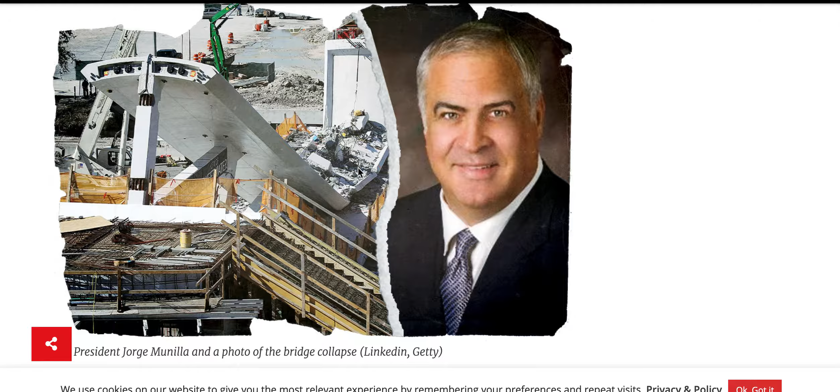September 24th, this is an older dated product. Reason why I brought it up for you guys is they hired a law firm suing Berger, the engineer. I looked at a few of these lawsuit postings, and this one seems more complete, that's why I'm showing you this one. I'll give you the link to the article below and you guys can read it one for one, but I'm just doing a quick narrative.

They said that once the use of the money towards the MCM, of $9.5 million towards the settlement of the university, it's total 14.2. They said 15 million here, but it appears they clarified down here, 14.2.

MCM is suing Morristown, New Jersey-based the Louis Berger Group. That's the engineering company that did the peer review, if you guys remember. A professional service provider that received some of the blame in post-incident government investigation. This is NTSB. The NTSB report said that because Berger's independent peer review looked at the bridge as a whole and not in increments, it missed a reinforcing flaw that led to the bridge's failure.

Berger's representative told the NTSB it was only paid to look at the bridge in increments. I understood it was paid not to look at it in increments, but the entire bridge, not as it builds. So it appears this might be a little defect in the article. I think Berger looked at it as an entire bridge and not as sections, and that's what I think this definition of increments means here. Of course the writer wrote increments here, and it's repeating something.

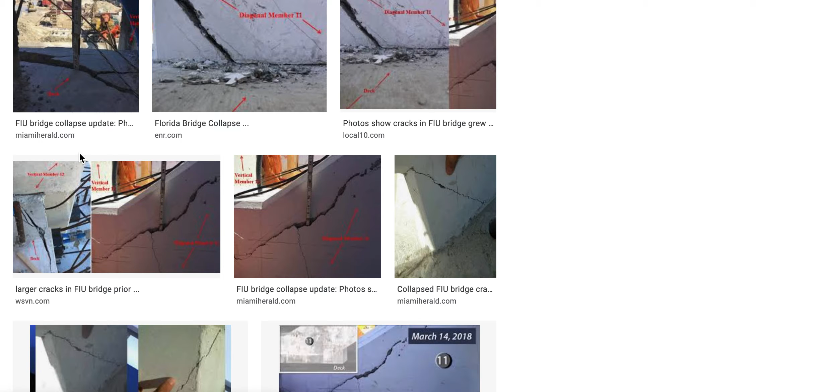So we know that cracks formed, right? So, and that's that one. When cracks form, so we have these cracks. Let's use this one. I think this is one of my images. Maybe not, because I did a lot. This is what they started post-tensioning on. So it's still in the air. And the MCM is claiming that, we don't know.

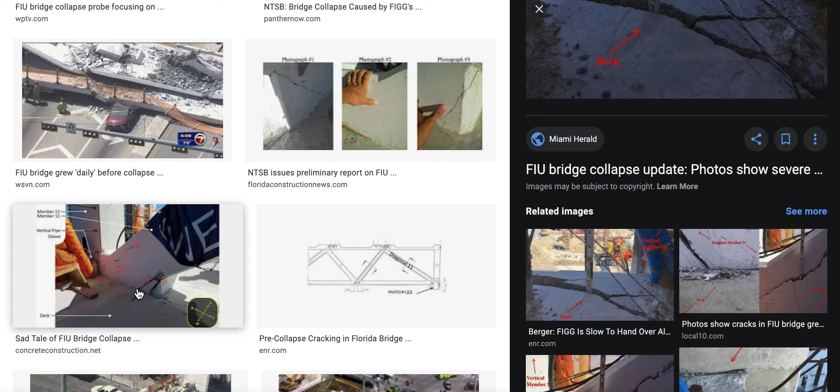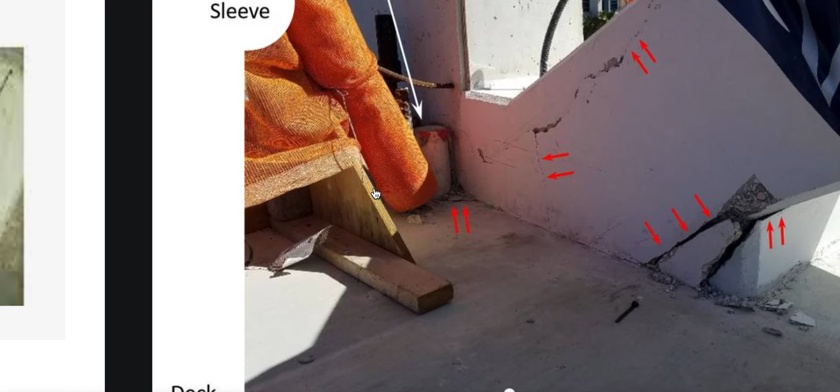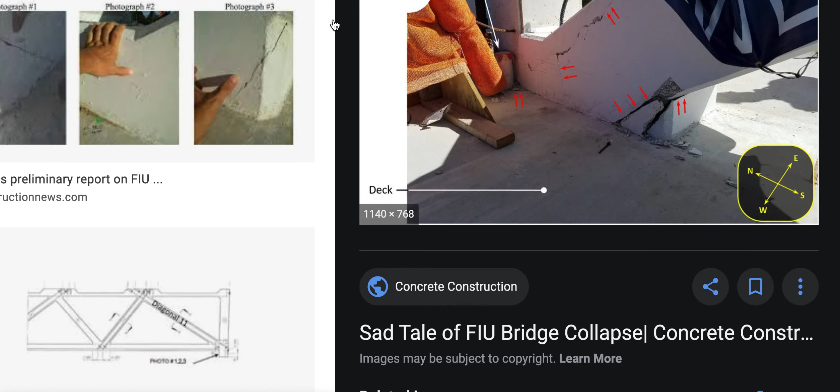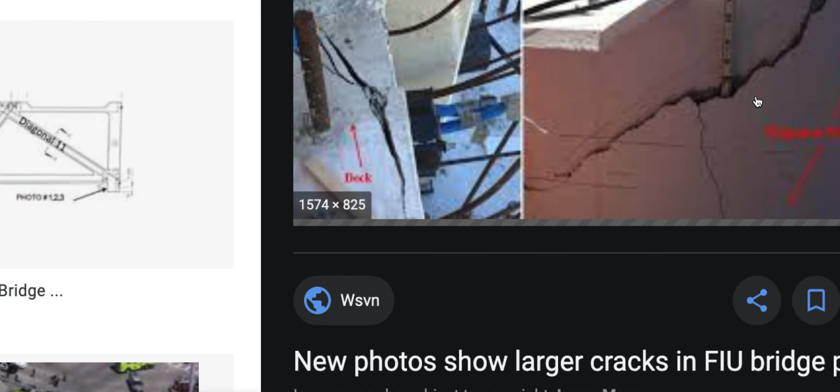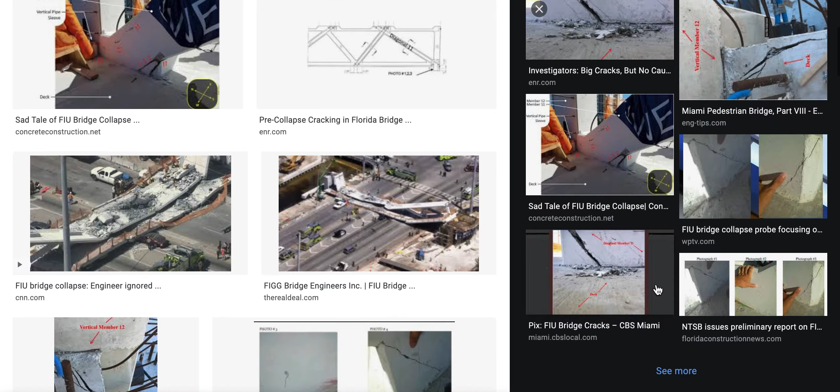But you can't post-tension, add all those thousands of pounds of kips on something that's just shattered. It's just shattered, and they just did a bad evaluation. We talked about that. I just wanted to put you up to speed. You can obviously see many of my videos on this. I just wanted to put you up to speed on MCM suing for $14.2 million. Let me just get you one more thing.

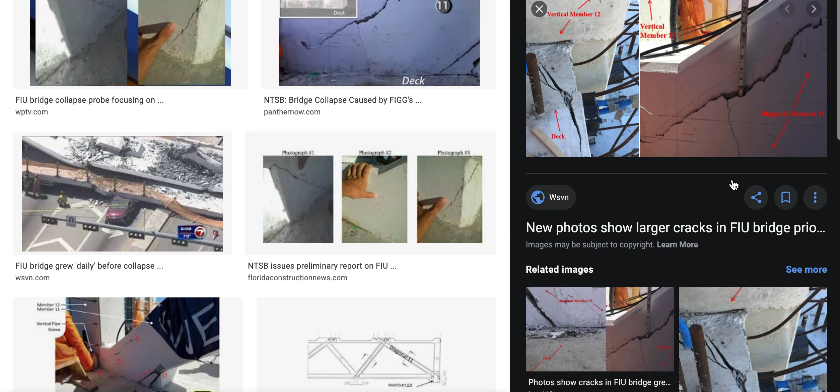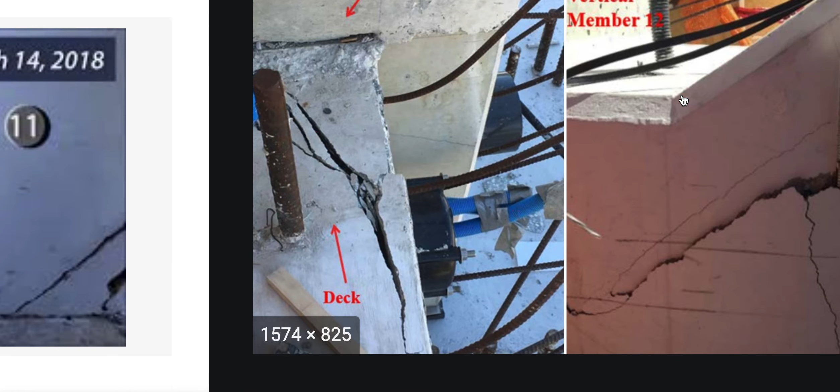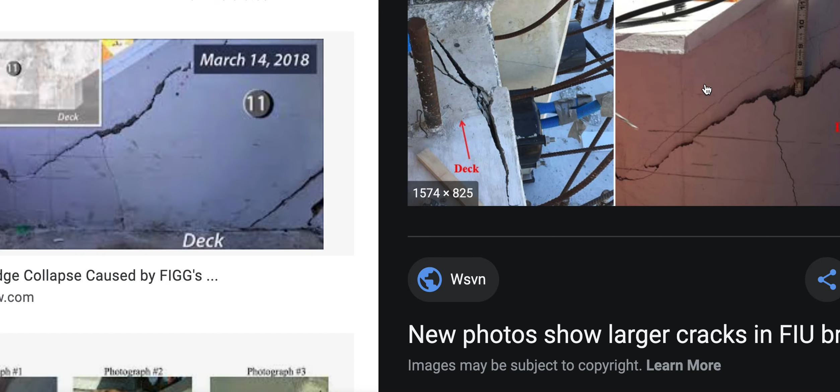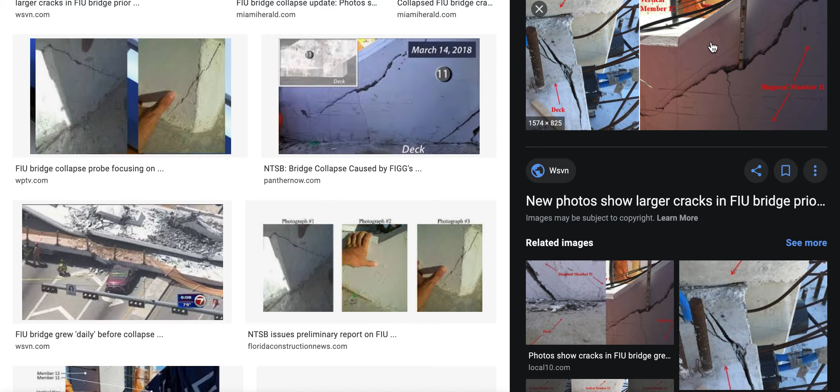So this shows torque, as I call it, torque. A rotation of the canopy was being rotated. When you look at this image alone, will it show it? All right, I didn't really want to show that. Let me go backwards. I just wanted the image. When you see that you can stick a tape measure in it, that means the top of 11 here rotated different than the base at the bottom. So if we're looking at it from the other end of the bridge, it has a clockwise rotation at this, and that's probably caused by, we'll consider the pads being level, the post-tensioning and your factors. You know, this I-beam shape, I-beam, H-beam, W-beam, however you want to look at it.

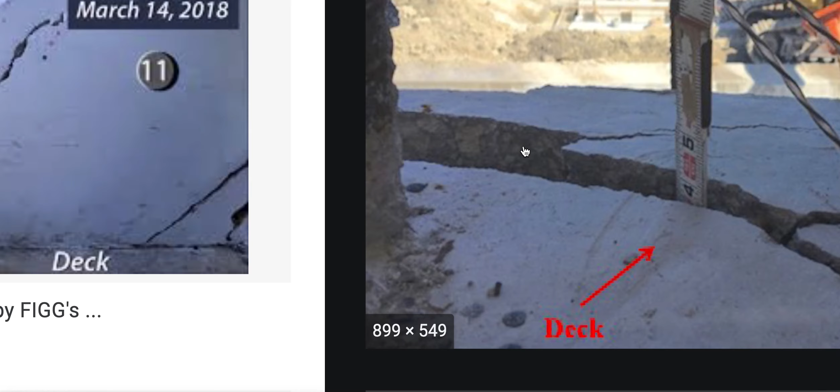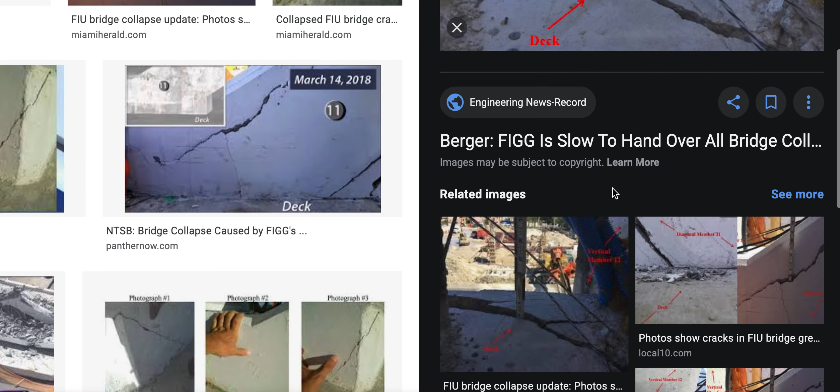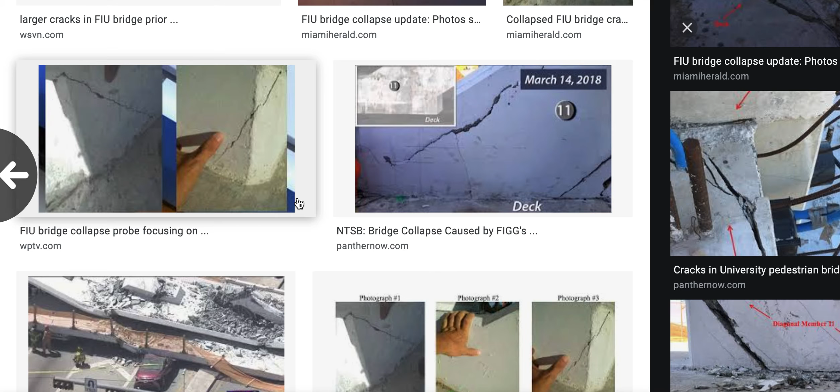Where are we now? I want to show you the base of that. Okay, here. So we have an elevation here. So that tells you that some torque or dropping. One side is going down, one side's going up. We know it's sort of going up because they talk about shimming. So you can't shim something that's already pinned down. So they were talking about shimming it. And we found images of shimming in other previous videos I showed you. They're, looks like nylon product.

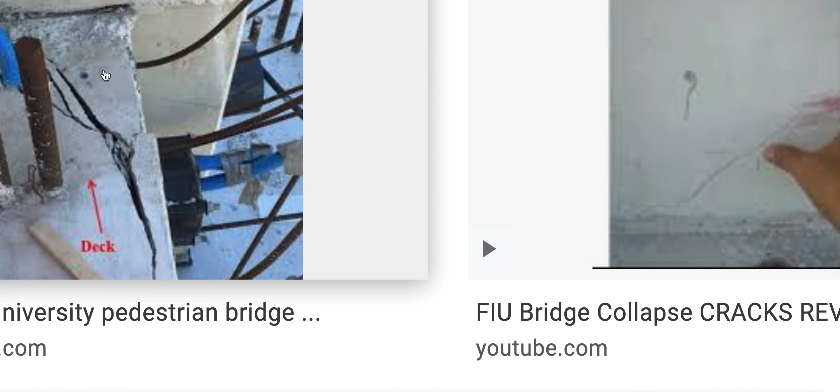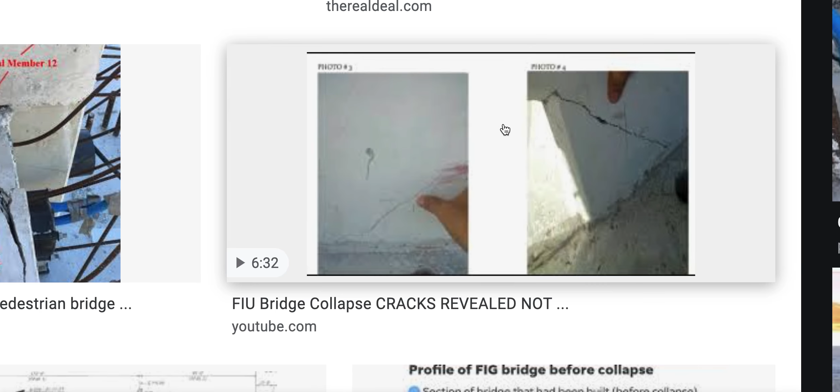Let's see, and here we go. Here again, we got one up, one down. So we have that torque action, and this part lowering on this side. So this column is no longer in plumb, I think. As you can see, the bottom's down on the left side as we look at it from the rear of it. And then on the right side, the bottom is up. So you have column number 11 doing a torque. As you're looking from, say, out here, the top would be counterclockwise, rotated off plumb from the top to the bottom this direction.

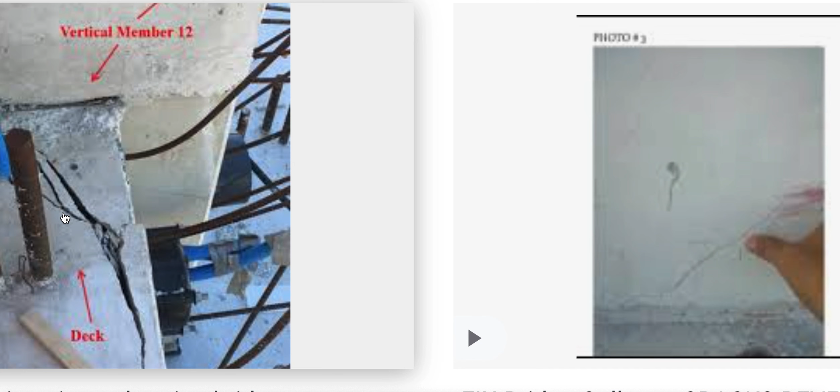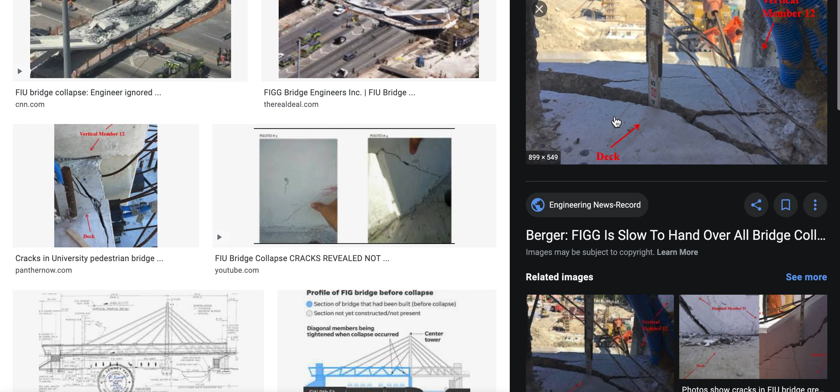And that would give us a downward rotation here. As you can see, the concrete's connected to this column still, and it's below this part of the deck. And then on this side, we see it indicating an upward direction. So it shows you that 11 has that torque action going on. And I show that with the measurements at the bottom in other videos, using the tape measure that they had available. So this thing had a torque action going on. It's just a nightmare.

And the NTSB, I think, was just the wrong organization to be investigating this. They're just a bunch of clowns.